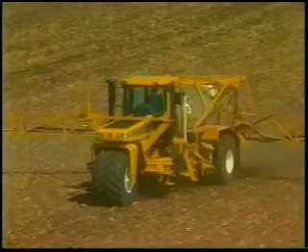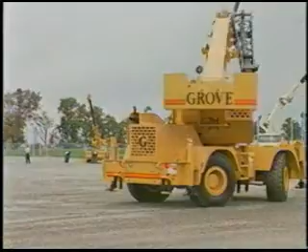For almost 50 years, Funk Manufacturing has been an industry leader in quality off-highway power transmission products. Supplying more than 500 OEMs around the world, Funk is the biggest producer of hydraulic pump drives, the largest independent supplier of agricultural transmissions, and has taken the global lead in the development and application of electronic shift controls.

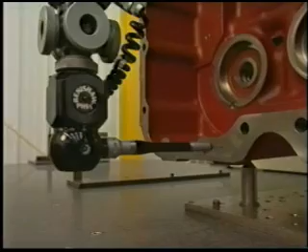Located in Coffeyville, Kansas, Funk's world-class reputation has been built on state-of-the-art engineering, cutting-edge research and development, precision manufacturing technology, a quality-empowered workforce, and unmatched application experience and worldwide customer support.

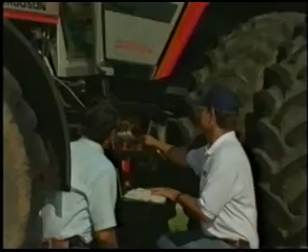This company is very proactive. We listen to the customer. We act together as a group in the customer's best interest. We act as a team, and we make the customer part of a team. We take the information that they give us. We work closely with them to determine what their needs really are, and we use the latest technologies available, applying our expertise learned over the years to help them solve their problem.

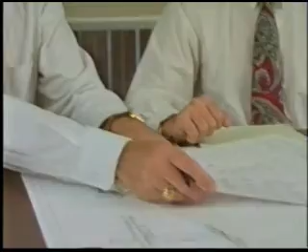This ongoing partnership with our customers is the heart of Funk's product delivery process. Our goal is to always meet or exceed our customers' expectations in quality, economy, and speed of delivery, while constantly improving our products and services. We accomplish this through our broad experience in application engineering, product customization, and our cost-conscious modular design culture.

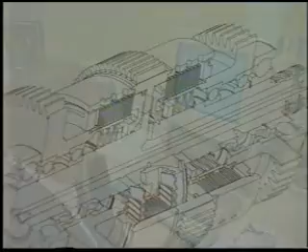Through a combination of in-house expertise, outside consultants, and worldwide design and production partnerships, Funk has the ability to assemble the optimum team for any project. State-of-the-art engineering tools that enable simultaneous development and simulated testing ensure the design and verification phase will reduce chances for oversights to a minimum, resulting in the best possible product prototype.

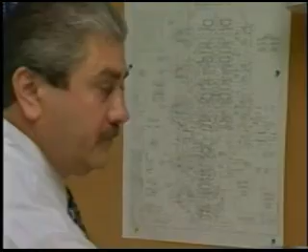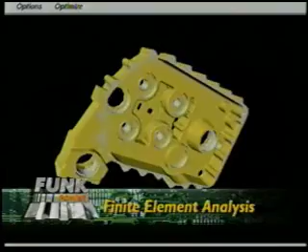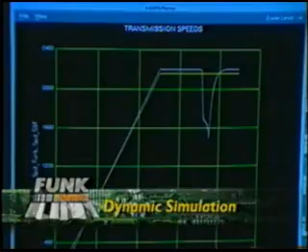Today's tools, especially the three-dimensional modeling tools such as Pro Engineer that we use, really lend themselves to the simultaneous engineering environment, where design engineers, tooling engineers, manufacturing people, and test and development engineers all contribute to this Pro Engineer three-dimensional model. That model is used not only to develop the design up front, but also to tool the parts, for installation drawings for customers, and when you get to the hardware, it really looks exactly like the design intended to be.

Once the prototype has been created, it's sent through a rigorous examination at the Funk Tech Center, one of the most sophisticated and modern test facilities in the industry.

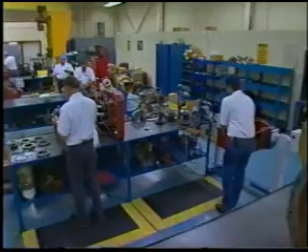After the component parts are received, the first prototype is assembled in the lab. Our test plan is primarily a product of the design failure mode and effects analysis. This process usually consists of accelerated life cycle testing, which evaluates clutches, bearings, and new gear train designs.

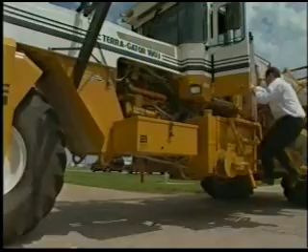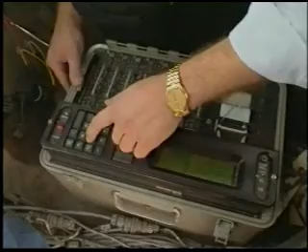One of the services we provide here at Funk is that we invite the customer to send in his vehicle to the test lab, and we'll do the fabrication work necessary to fit a Funk product into that customer's vehicle, do the necessary shift development work, and then invite the customer in to drive his vehicle with the Funk product in it. This gives him an opportunity to compare what he has today versus what we're showing him here at Funk. This is really a win-win situation for the customer as well as for Funk, and we're very proud to show off our capabilities to the customer.

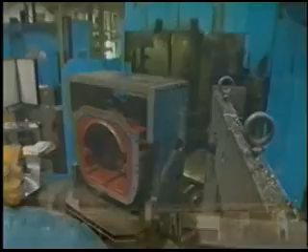After the prototype has passed its rigorous tests, the product is machined and assembled in Funk's state-of-the-art manufacturing facility to exacting quality standards. Funk is an ISO 9001-1994 registered company and bases its quality system on those international standards.

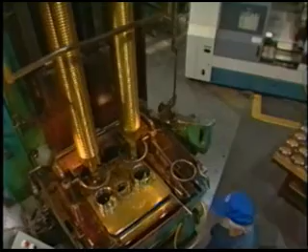The key to quality compliance is our world-class workforce. In my opinion, Funk's greatest assets are their people. They're well-trained, very experienced, and have a true desire to produce the best possible product. This is not because of a piece of paper with a quality statement on it, but because of their nature to not only want, but demand good quality.

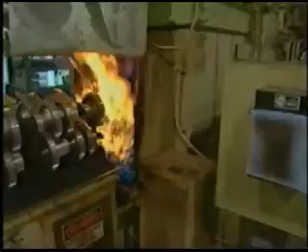Each employee is responsible for their own quality and very proud of this. They know they have the right and even the authority to stop the production line or any procedure of operation if they perceive a quality problem or a quality issue.

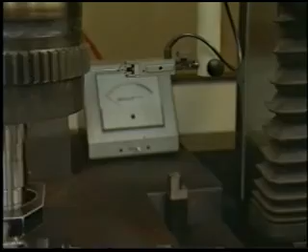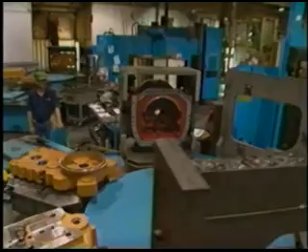They know that nonconformance to specifications is totally unacceptable, and they will not allow this to happen. Crucial phases of the manufacturing process are computer-controlled and constantly monitored. The highly skilled machine operators and assembly workers are provided with and trained in the use of the most accurate measuring and gauging equipment in the industry today.

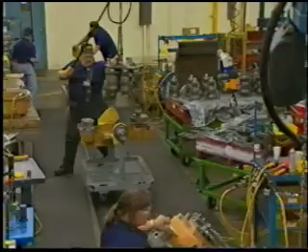Funk uses the focused factory concept of manufacturing. Each major product line has a dedicated factory that facilitates just-in-time production methods.

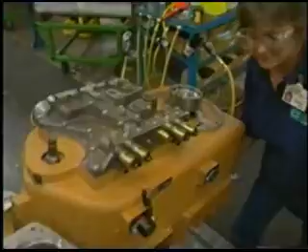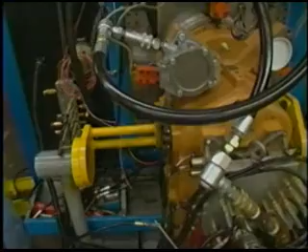Transmissions are thoroughly tested after assembly with computer evaluation of each unit. The final test checks shift performance, hydraulic pressures, and flows. Results are saved as a performance baseline for future reference.

We have some of the latest and up-to-date machining equipment available, but without our people, we would not be a world-class manufacturing organization. As a world-class manufacturer, we have a global customer base that requires a worldwide network of service centers.

4 or 5 times a year, those service representatives are brought into the tech center for training. They're introduced to the newest technologies that have been developed since their last visit. Refresher courses or updates on new service techniques are also available.

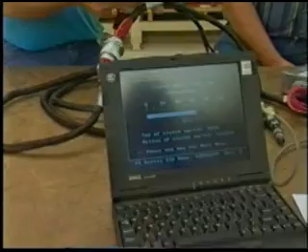If training for a Funk product is needed by the OEM, the sessions may be conducted at the tech center or at the customer's facility. It's all part of Funk's world-class service.

What's so exciting to me about Funk is its dedication to being a world-class supplier of transmissions and related products. The Funk team recognizes that to be world-class means not only high-quality design and manufacturing processes, but also a distributed manufacturing base.

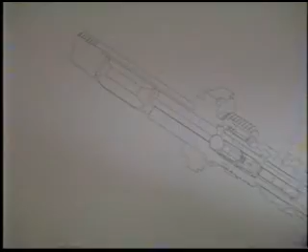That gets us closer to our customers, supplied by a global supply chain that supports our distributed manufacturing strategy. Throughout the world, we have manufacturers that can add to Funk's expertise to come up with the best transmission on the market. This global strategy is central to maintaining Funk's leadership in electronic shift controls and analog proportional control valve development.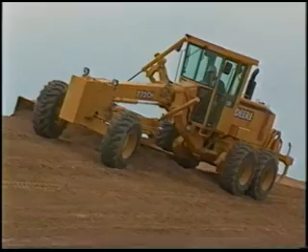A technology that is critical to the next generation of power transmissions. Our newest valve enables the most precise control to date of clutch pressure and timing, providing smooth power shifts in all operating conditions. Funk has been a leader in the application of proportional valve technology since 1985.

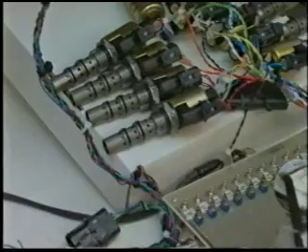Through creative thinking, research, and development, we intend to advance that technology and maintain our industrial leadership. The key to that continued leadership is the Funk Electronic Controls Group, which manages the production of microprocessor-based control modules used for transmission control and performance monitoring.

The goal of the Funk Electronic Controls team is not to produce electronics. Our goal is to help produce the best transmissions in the world. Funk engineers use modeling, lab experiments, and years of application experience to concentrate on developing new concepts in transmission control.

Funk's ECU manufacturing partners, recognized in the industry as best in class, produce the electronic equipment. This allows the Funk team to concentrate its research and development resources on design software and hardware specifications that optimize energy management during shifts. Further electronic system testing is done in one of the 6 Tech Center test cells.

There, an actual transmission can be controlled by the new shift design, allowing for clutch pressures, torques, and internal component acceleration to be analyzed. Using mobile data acquisition from actual field tests or precisely controlled weight sled testing, final hardware and software validation can be achieved by recording clutch pressure and other key parameters.

This data is stored on a floppy disk and analyzed either at the machine or taken back to the lab for remote analysis. The final results will be a transmission control designed for precise load matching, the best fuel and time economy, and the smoothest shifts in the industry.

Our customers ask us for products that perform at a cost they can afford in a very short amount of time. And in Funk Manufacturing, that's exactly what we deliver.

And that's exactly what Funk will continue to deliver into the future as we marshal our worldwide resources to keep sharpening the cutting edge of transmission technology.

We invite your partnership in this venture. Let us custom design and build the next generation of power transmissions with you. Because at Funk, the future is now.